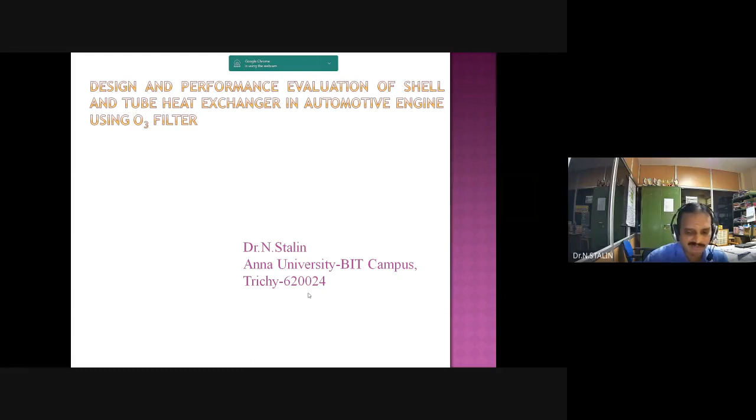So the normal water is converted into distilled water. My aim is to recover the waste heat as well as convert normal water into distilled water. Also, in the existing automotive car engine system, there are a variety of issues.

Number one, the automotive car engine has minimal conversion efficiency because a considerable amount of waste heat is emitted to the atmosphere, so I use this method to recover the waste heat. The existing car engine's CO2 emission further increases the atmospheric temperature and pollutes the environment. So I use an O3 filter.

A CHP system is not adopted in existing car engines, but my idea is to adopt the CHP system. The proper air fuel ratio has to be optimized for combustion reactions, and a continuous flue gas monitoring system has to be adopted. Waste heat recovery is not tested in the existing method.

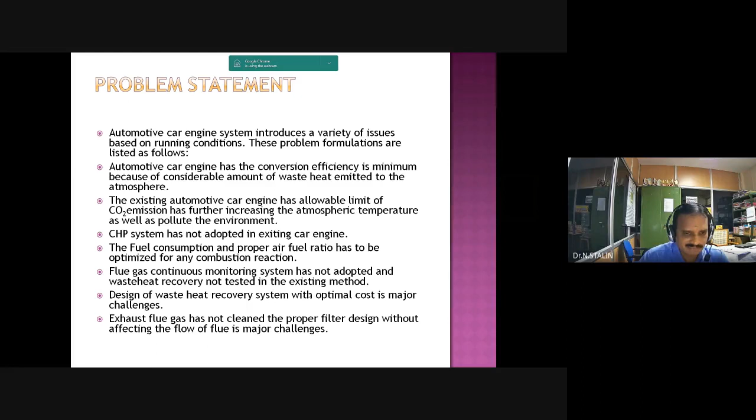Design of a waste heat recovery system with optimal cost is a major challenge, and the exhaust flue gas is not cleaned; proper filter design without affecting the flow of flue gas is a major challenge. So these are the problems I identified.

So my objectives are to implement the new concept of a CHP system to achieve the maximum possible heat recovery, to design a suitable shell and tube heat exchanger for recovering waste heat, to investigate the exhaust flue gas outlet using a flue gas analyzer, connecting an O3 filter to reduce particulate matter, and to incorporate a CHP system model using different thermocouples to monitor temperature and output gas analysis in different running conditions.

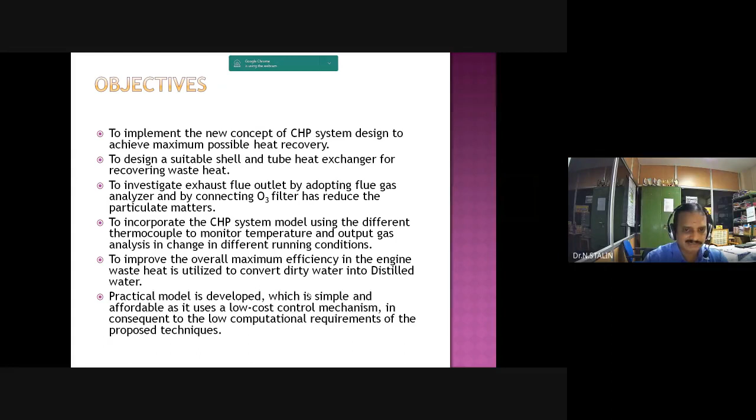To improve the overall efficiency of the engine, waste heat is utilized to convert dirty water into distilled water. A practical model is developed which is simple and affordable, used as a low-cost control mechanism owing to the low computational requirement of the proposed techniques. So this is the CHP system.

Here you allow the exhaust gas through the shell side, and inside the tube side you allow the water, and at every point you fix thermocouples to monitor the temperature and find the average temperature of the entire flue gas.

So whatever coolant is supplied inside the tube gets evaporated. So at the outlet, you will get steam. So by adopting one condenser, it condenses the water and makes it distilled water. So that is a simple concept.

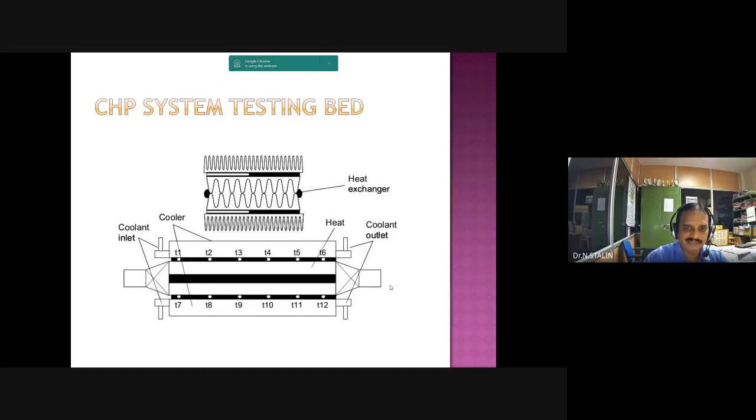So the experiment includes temperature measurement. We use T-type thermocouples at several points, almost 13 points, besides the entire measurement lengthwise of the heat exchanger, the top of the cooler and inferior cooler making contact with the surface through the heat exchanger. Water flow measurement and coolant flow through the heat exchanger. The temperature of the exhaust gas measured in and back of the thermal energy exchanger.

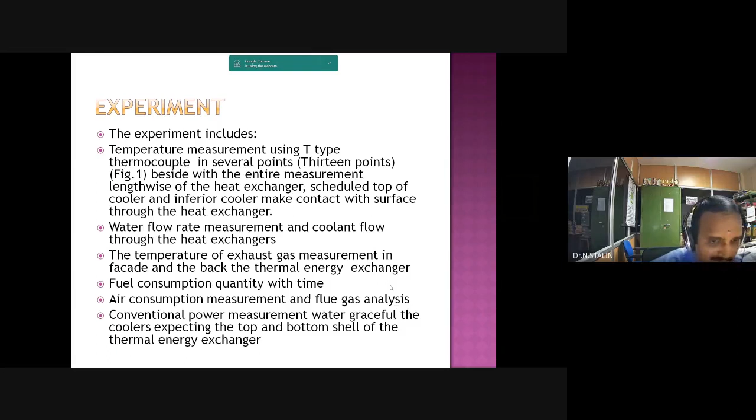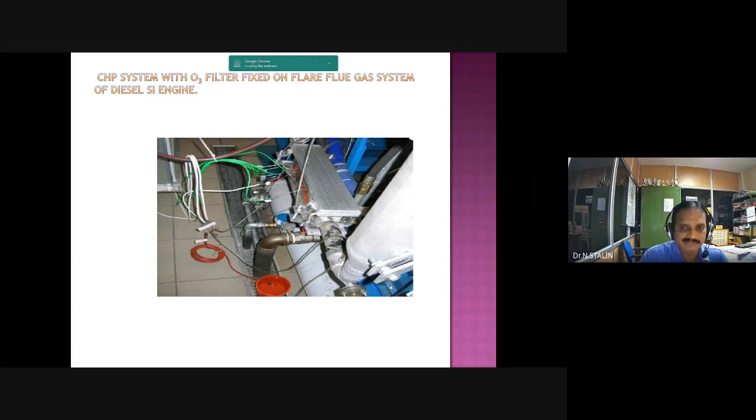Fuel consumption quantity with time. And the air consumption measurement and the flue gas analysis we have also done in parallel. And conventional power measurement, water flow, and the top and bottom shell of the thermal exchanger are also measured. So this is a simple system which we used. At the outlet of the engine, we fitted the O3 filter, and the flue gas is also continuously monitored with the flue gas analysis, and we tested with the diesel engine, self-ignition engine.

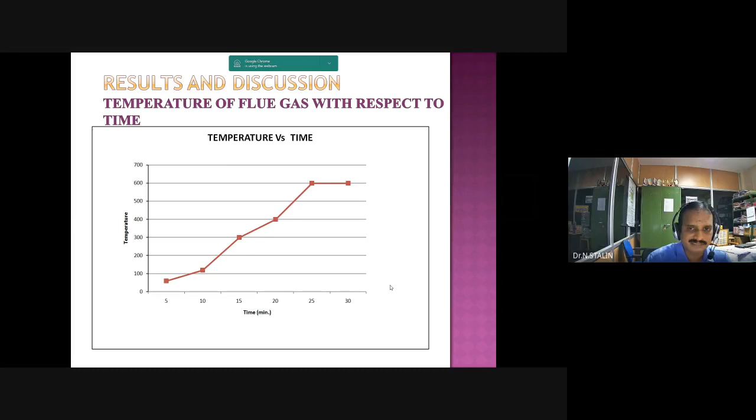So first I measure the temperature with respect to the time. After 25 minutes, the temperature of the gas output is constantly about 600 degrees centigrade. And when we consider the combustion heat with respect to the torque, when we go for a higher torque, the combustion heat range is also high, and the exhaust gases are emitted from the engine. That will increase the rate of the engine power. So we require using a heat exchanger of a different type.

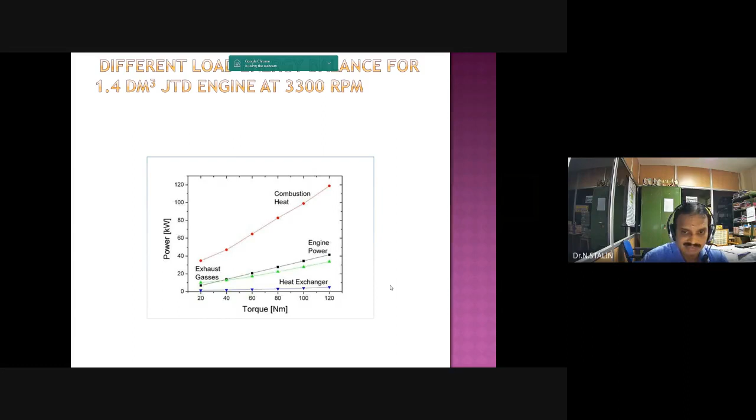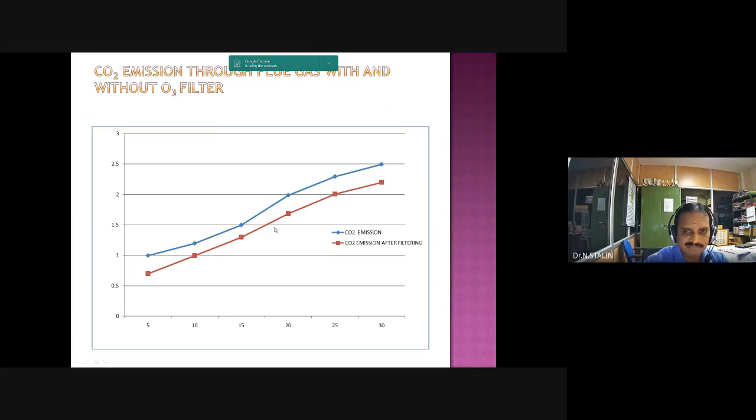Why I chose shell and tube is that it is easy to recover, and compared to other types of exchanger, it is easy to clean and easy to recover the heat. So this is CO2 emission through flue gas with and without O3 filter. We tested without O3 filter. So we have emissions. The blue color CO2 emission is very high with respect to time, and here the CO2 emission with the filter is minimum compared to without filter, and temperature is also measured at different points with respect to time.

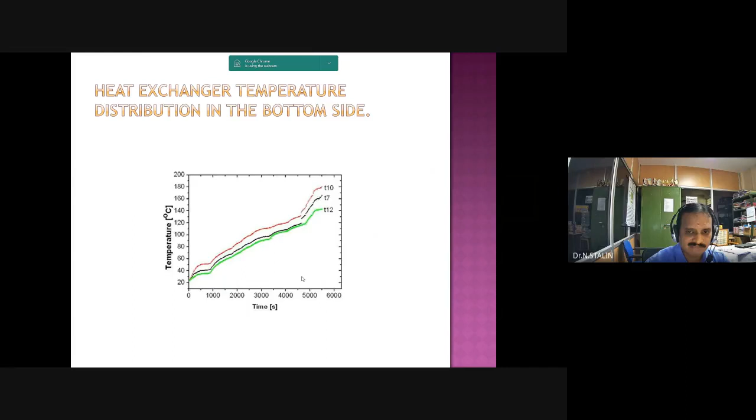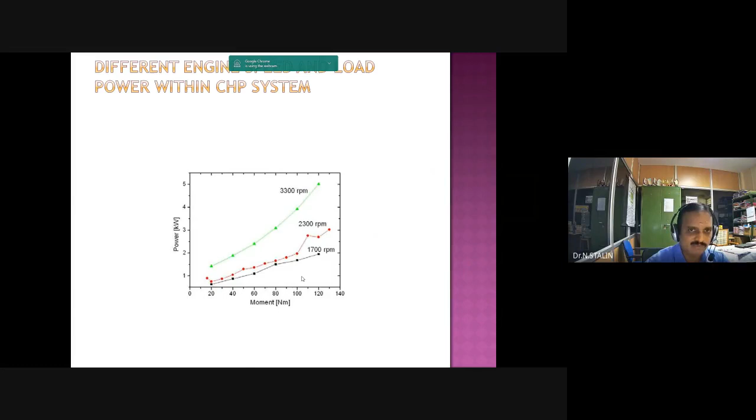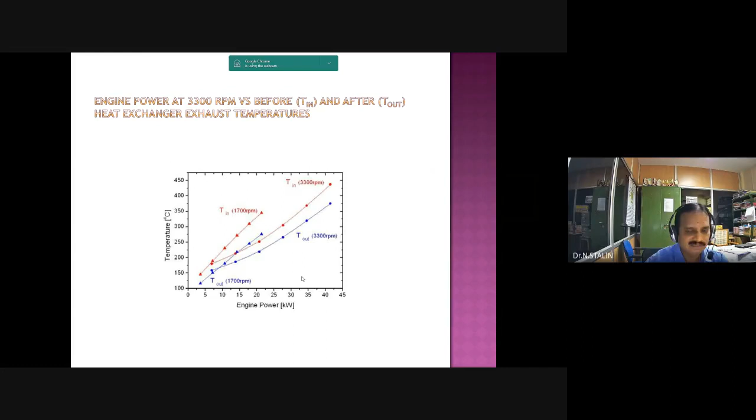So this goes to the maximum range of 600 degrees centigrade, and with different RPM and different torque we have measured that, and a higher RPM will give you more output of heat. And also with respect to the engine power, what could be the temperature at the inlet and outlet of the heat exchanger, and what would be the optimum level after adopting the filter. So we tested experimentally, and the gas outlet after recovering the heat is reduced to nearly about 150 degrees centigrade.

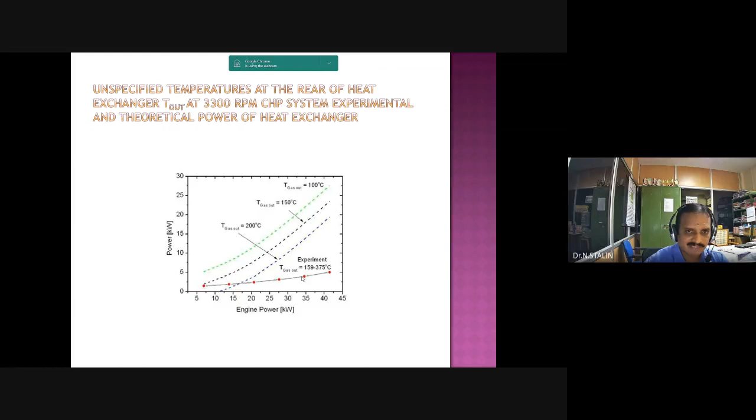So if I reduce further, what happens? Due to the reduction reaction, carbon dioxide is converted to carbon monoxide. And emitting carbon monoxide is very dangerous. That is why I restricted heat recovery only up to 150 degrees centigrade. So the design optimization of the heat exchanger was experimentally studied with the O3 filter, and we tested with different RPM and different kilowatts of heat that can be absorbed. Almost 50% increase in efficiency with respect to the existing one.

And the main achievement of this experiment: the exhaust temperature reduces from 600 to 300 degrees centigrade. The experiment concludes that it is possible to recover 80% of the heat, but to avoid the reduction reaction in the existing fluid. And also the heat energy power is equal to the power of a car's 1.4 dm cube engine capacity, a typical alternator used for a car. The research paper concludes that much greater macro level CHP research has to be updated based on the micro level design, with or without O3 filter, and for any type of diesel as well as petrol engine it is possible.

This research has scope to take on the challenge to reduce exhaust heat and increase CHP system efficiency with the optimal design of residence time. Heat exchanger size for the different flow patterns of the waste heat recovery system will improve the overall efficiency by 20% and reduce the pollution by 50%.